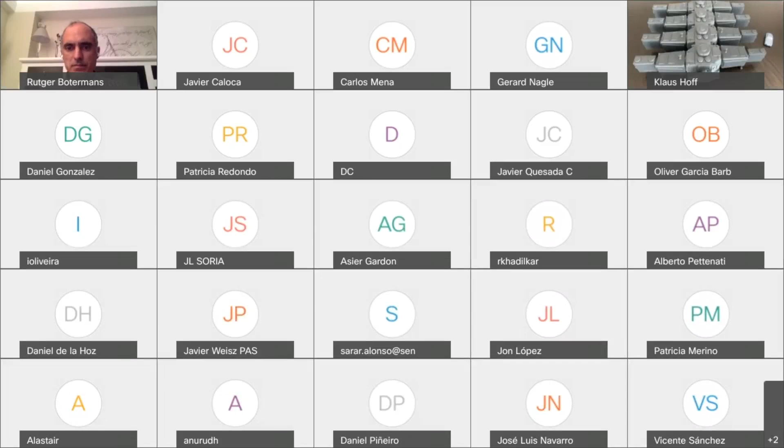Try to say something to make sure that the sound is working. Working. Yeah, we can hear you now.

There's something wrong with your camera, at least on my end. You seem like you're blinking your face. Are you using some kind of background?

Klaus? I don't know if you are speaking now. We cannot hear you. It seems that either low bandwidth or CPU problems with your computer. Okay, can you hear me now? Yeah, we can hear you now.

I think it's better by turning off your video, your webcam. I'll switch it off. Yeah, that's better, we save some bandwidth. We can see your screen, we can also see your mouse. So if you want to highlight something from your presentation, you can move your mouse.

I'll give you some ideas about the challenges and limits we have when applying lubricated reciprocating compressors for hydrogen. To introduce, we have the possibility to compress the gas lubricated or non-lubricated. Non-lubricated has been possible for many years, let's say a minimum of 30 years, due to the development of PTFE with special fillers as the piston and rider ring material.

With these modern plastic materials, we are able to do it non-lube too, but in some applications lubricated service is mandatory - especially in refineries. Refineries always ask for a lubricated compressor since they would like to run the compressor for a minimum of 3 years without any interruption - 3 years,

365 days, 24 hours. They need the compressor running all the time, and therefore they prefer lubricated service, because with lubricated service the wear of the rider band and piston rings is negligible, allowing the compressor to run for a longer period of time.

Some design aspects in our world: we work in accordance with the so-called API 618. API 618 stands for American Petroleum Institute. This is a group in the United States which creates guidance for all equipment used in refineries, and the 618 standard is the one for reciprocating compressors.

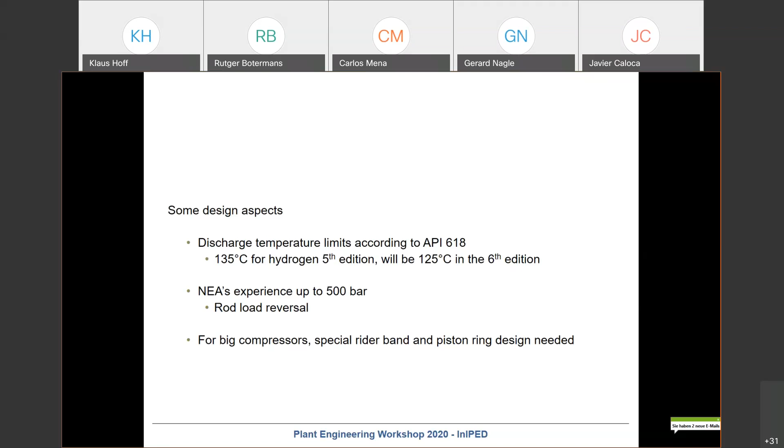The reason for this step piston configuration is pretty easy: we would like to protect the packing. The packing is at the crank end side of the compressor, and it has to seal the gas against the atmosphere toward the frame. Here the pressure limits are more restrictive compared to the pressure limits on a piston. So the packing, in terms of lifetime of its internals, is much more critical than the piston rings. Piston rings can be designed for higher pressure differentials easily. That's the reason why we choose this special cylinder and piston design, just to protect the packing from the high pressure.

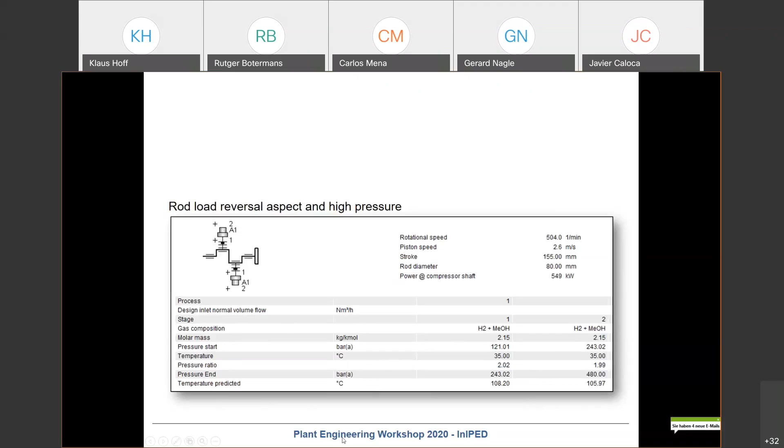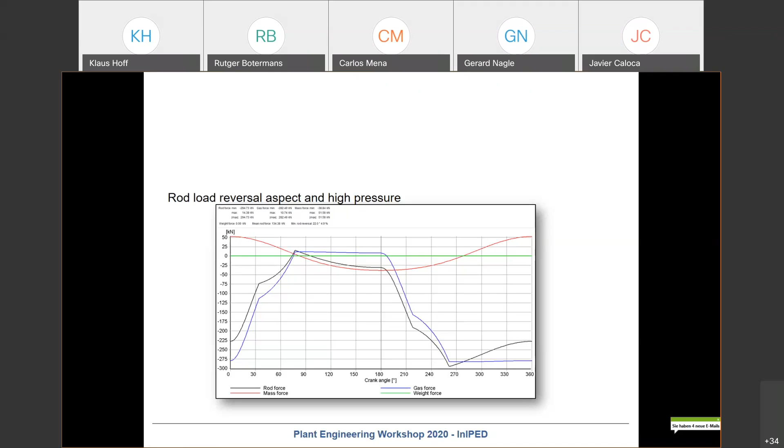Therefore, we developed a hydrodynamic program some years ago, and this is always used because it's part of our daily design program.

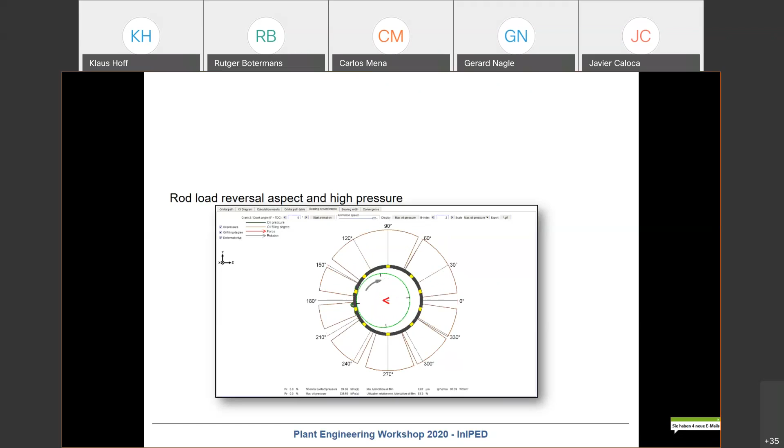For example, when you lose a discharge valve on the head end side, meaning the head end compression chamber always has discharge pressure, then typically you also lose the rod load reversal, and the consequence is typically a failure on the crosshead pin bearing of that throw. So the reciprocating compressor engineer has to be very careful with this challenge.

I mentioned it for the lubricated hydrogen compressors. There can happen some critical things with the rider bands and piston rings. And here I've collected for you some pictures of what can happen. You need to know what to do to avoid that.

Here you see rider bands of hydrogen refinery compressors, big compressors. These are compressors in the power range of 2 to 4 megawatts. So big compressors, our biggest frames. Cylinder diameters in the range of, let's say, 450 millimeters. Some of them 2-stage, some of them 3-stage, depending on the suction pressure. Typically, this refinery application has a discharge pressure in the range of 120 to 150 bar.

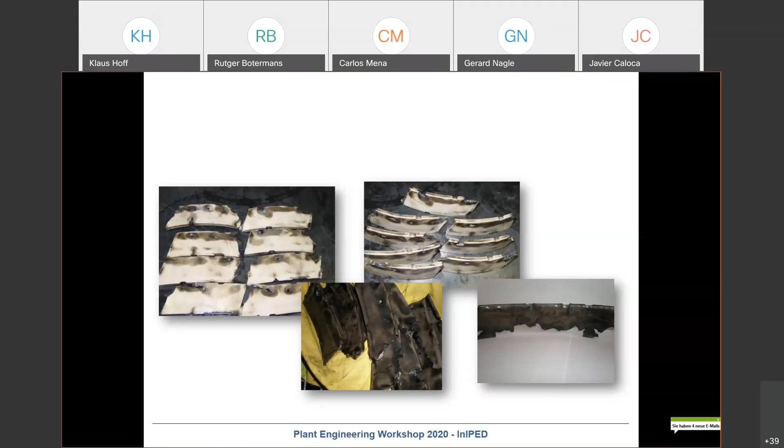And we were faced some years ago with these issues. It looked like burned, completely overheated, and material was really removed. Here, for example, you see that there was a strong erosion in many areas of the rider bands, which were at that time not completely understood. In the meanwhile, we understood what can happen there and found the right answer to avoid that.

Here's another picture. The holes in the rider bands which seem to be burned. Here at the end of the rider bands were eroded areas, material was removed. And what we also found is that for rider bands which were not completely destroyed yet, it seemed to start at the pressure relief grooves here at the end.

So some ideas were immediate there that it has to do something with the flow, the leakage flow of the gas, but the leakage flow of gas typically has not the power to destroy or to erode material. So we were convinced that in addition, liquid must be present there to create this, let's say, erosion or cavitation issue.

The process typically has definitely no liquid, because the source of the hydrogen is completely dry. So the only liquid we have in the system is our own oil, the oil which is used for the lubrication of the rider bands.

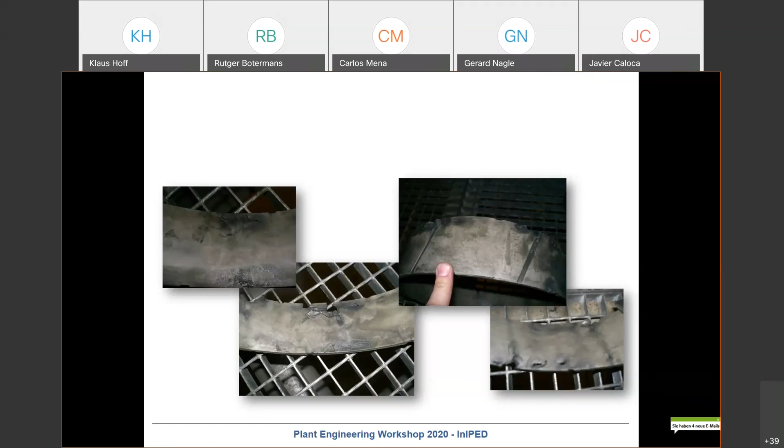Here's another picture of what I mentioned before. Here you clearly see it. Most of the rider band looks okay, but here at the end of the pressure relief groove, we have a high amount of eroded area, which seems to be a kind of cavitation.

When you press, for example, diesel pumps for engines, when you press with high pressure to a small hole, liquid, then at the end and at the beginning, by the high velocities of the oil, cavitation can take place. And here the pictures are pretty similar.

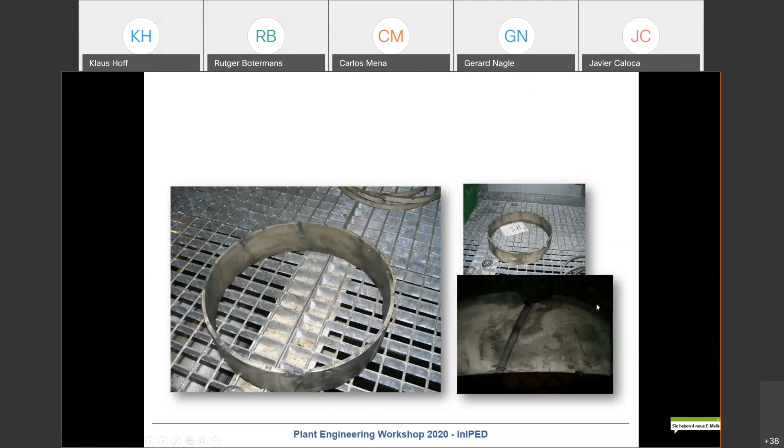Here's another picture. This is the end gap of the piston ring, so this is not the rider band, it's a piston ring. And of course, these end gaps here are not completely closed. Even when we reach the design temperature of the compression chamber, even then we have a small amount of open

gap where a leakage flow can take part or take place. And here you see there are flow signs, and again here erosion starts. This is also a sign we typically found that at the end gaps of the piston rings also erosion was present. Here is another picture of a rider band where you see the shape of the flow pattern. You can see because oil was part of the flow, and therefore you can have an idea how the leakage flow act.

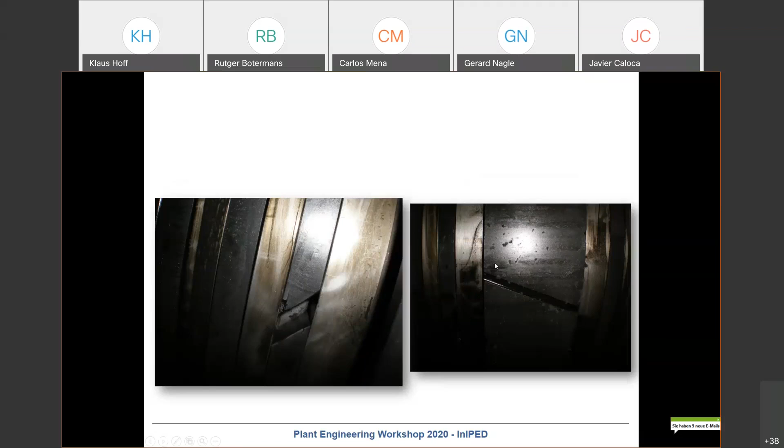Amazing was also this observation. In one of the compressors, we did not only find the issues with the rider bands, but also this pressure release bore was also strongly eroded and increased. So originally, of course, this was a small bore, round, not in this, let's say, rectangular shape.

It was round, and it was eroded. And when we opened the piston, indeed, we found oil in the piston. This pressure release bore is mandatory according to API 618 because we have to make sure that the internal of the piston must always be pressure released. That is a safety device, because when you have a complete gas-tight piston which is filled up with gas pressure and you bring it in a shop and open it, it can create an explosion because there's hydrogen pressure, for example, in this piston, and when you open it, this hydrogen can be released and can be ignited and can create an explosion.

For other applications where you have a poisoning gas, it is even more critical, because when you open it in the shop and you have CO, for example, then people may be hurt. So this is a mandatory thing for API 618 compressors, and it makes sense. It is reasonable. And the bore was also eroded and the piston filled with oil.

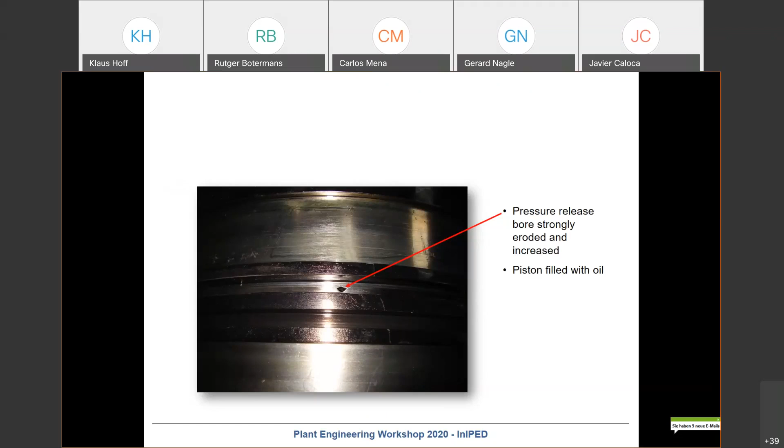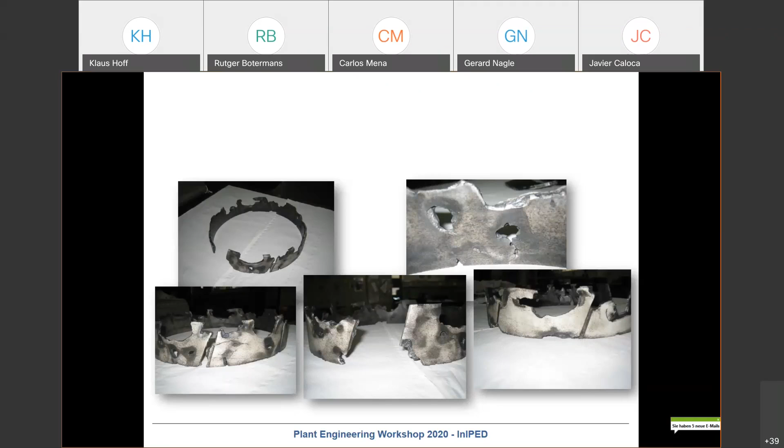Here are some other catastrophic rider band failures we were faced with. And these problems occurred, let's say, in the mid of 2004 to 2007, not only on one compressor, but on many compressors at different installations, not in one installation, it was on different refinery installations. So it was really a technical issue which could not be linked to a certain plant. It must be an issue linked to the design of our compressor.

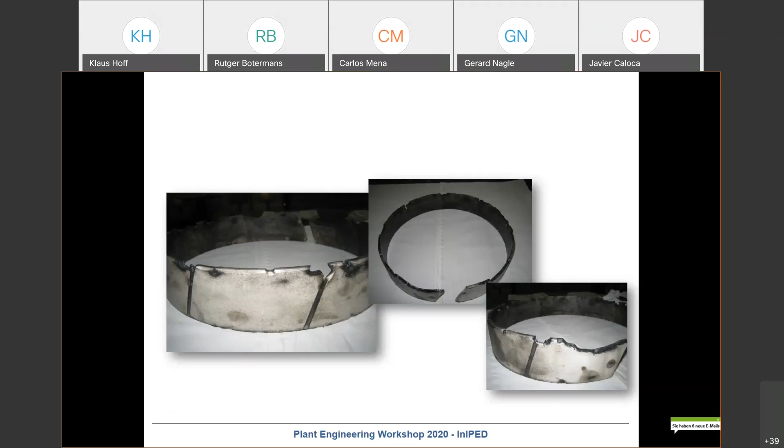Another picture, so always similar. We could change the material itself, so white material means we have no carbon in, it's only PTFE with glass fiber, but whatever we installed, the same issues came up.

And it is clear only hydrogen flow without any liquids would be impossible to create this erosion. So a liquid must be part of the issue, and the only liquid we had was the oil of the lubrication.

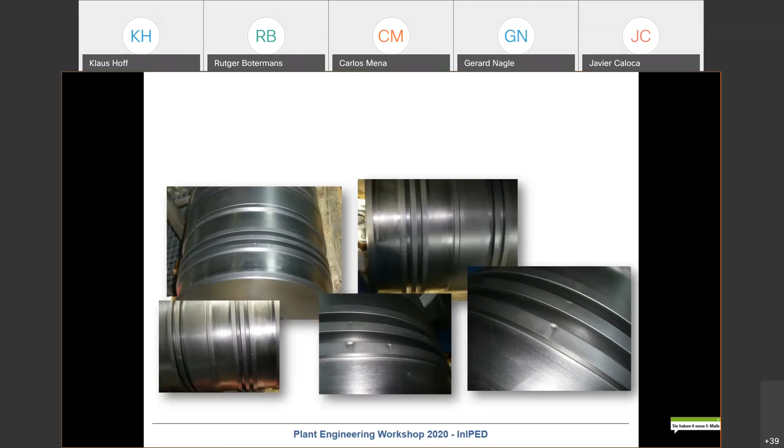Yeah, here the technical explanation of these findings. We had too much frictional heat created at rider bands, and this created excessive oil evaporation. Why do we have too much frictional heat at rider bands?

The API demands a certain amount of rider band length depending on the weight of the piston. In the API, typically horizontal compressors are used, and the rider bands have to bear the weight of the piston and the piston rod. And on basis of the weight,

the rider band extension is calculated. That means here in this application, because of the high power and the relative high or big diameters, the configuration of piston and piston rod were pretty heavy and creates a certain amount of mass, and this must be compensated by an amount of rider band length.

Now, since there is no real hydrodynamics, we have always a mix of hydrodynamics and metallic to PTFE contact tribological system. We create heat, and this heat creates high temperature, of course, locally in the contact zone. We create high temperatures. And with high temperatures, it's clear an oil evaporation occurs, because in this contact zone we have oil.

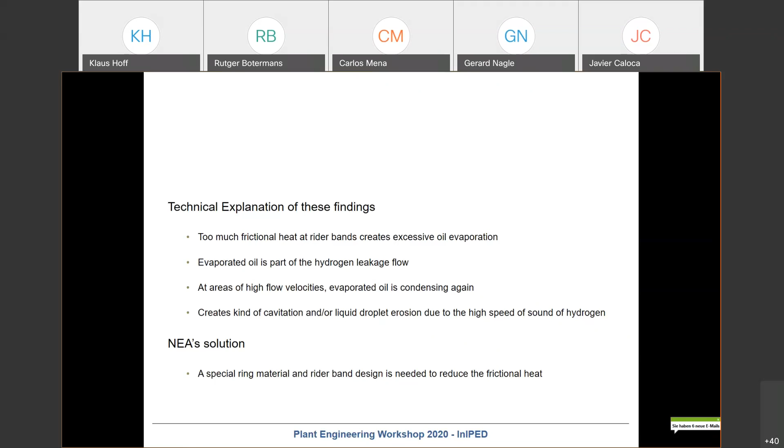This is important for you whenever you have the task to compress hydrogen, high pressure or relatively high pressure above 100 bar and big power - this issue can occur and you have to be careful with the rider band design.

I mentioned this is the second part of the presentation. The reciprocating compressor also allows compressing gas, not only hydrogen, without any oil.

We got the chance some 30 years ago with the development of PTFE as a rider band and piston ring base material. So PTFE is the key that allows us to run reciprocating compressors non-lubricated.

The PTFE, together with the liner material or piston rod material, is able to create, together with the gas, tribochemical reactions which create a stable transfer film. It's a certain amount of lubrication, not by a fluid.

Now the lubrication takes place just by the tribochemical reaction of the ring material, the liner material, and the gas and the pressure. So there's a complex chemical reaction which creates a so-called transfer film on the liner surface. When you have a good tribological system, this transfer film is very stable.

When we go up to higher pressures, and now we talk again about hydrogen, we at NEA had a lot of experience with hydrogen filling bottle filling compressors. The steel bottles for hydrogen typically, in the past, were designed up to 220-250 bar, and for this pressure a non-lubricated reciprocating compressor can be used when done correctly. Above this pressure, typically nowadays we use, and this is how NEA works, diaphragm compressors.

The pressures of steel bottles nowadays go up to 350 bar, and for that application we no longer use a classical reciprocating compressor, but a diaphragm compressor. To the diaphragm compressor, I come in the last part of the presentation.

When you do it as a recip, then you have some challenges. Typically you have a high sealing pressure on the packing. What we know from experience up to now is that a gas-tight solution for dry running can be achieved up to 100 bar at the packing with 1 year of continuous operation, so 8,800 hours. When you go above 100 bar at the packing, the lifetime goes down.

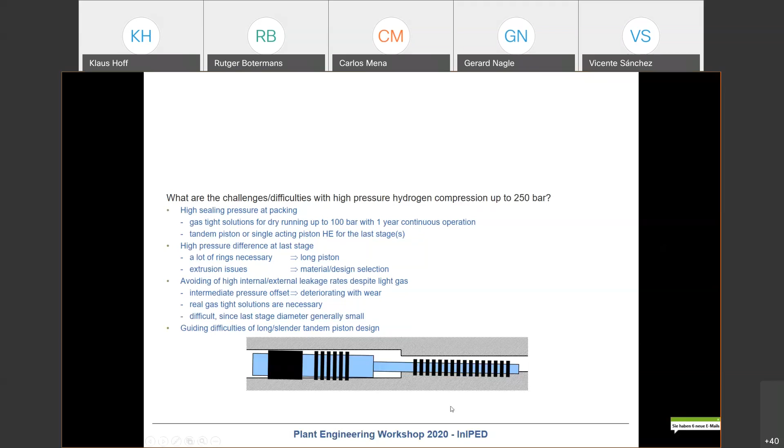Here are some examples of these types of bottle filling compressors, and you see in the end it depends on the suction pressure. For example, here was a relatively small suction pressure, so we needed 4 stages to create these 200 bar. In some applications, since the suction pressure was relatively high, look here, 36 bar, then we could do it in 2 stages. This one was 210.

Here in this application, the final discharge pressure was not as high. But also here we had an application where we managed it from a minimum of 19 bar up to 224 bar with 2 stages. So it depends on the application, mainly on the suction pressure, but also on the allowable discharge temperature. Here in this bottle filling segment, they are not as strict as the refineries in terms of allowable discharge temperature. So in this case we probably have discharge temperatures in the range of 140 or 150 degrees C, which would not be allowed in a refinery.

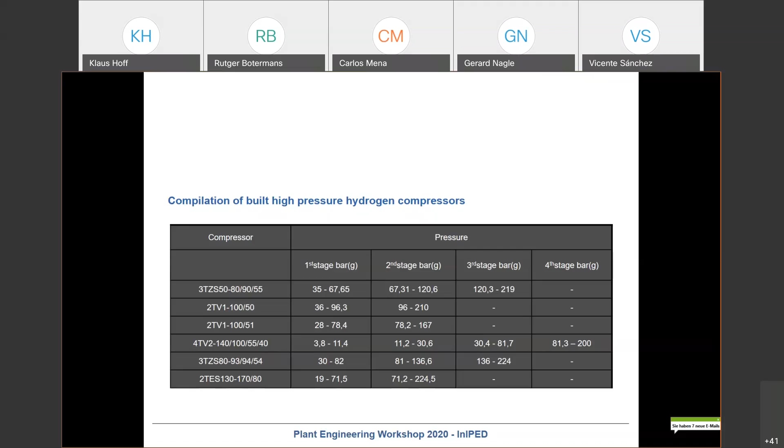Just to give you a small explanation about how the piston ring works. Here's a sketch. This part is a piston with a groove for the piston ring. This part would be the liner. Now on that side we have the high pressure, and on that side the low pressure.

What happens with the pressure? The pressure goes into this gap and into this gap, and the pressure on that surface presses the ring against that surface. The pressure on that surface presses the ring at the liner surface.

In the gap here, it is not really a gap. By the contact pressure you have almost no gap, but it is clear that due to surface roughnesses, a small amount of gas flow will still take place here. By this small amount of flow, we have a pressure reduction on that area. Therefore, when you add the pressure on that surface and the pressure on that surface, you have a relative force acting against the liner surface, and a sealing effect is achieved.

The same is true for that surface. Here also a very small leakage flow will be present, and therefore the pressure is not constant as here, so we also have in this direction a relative force which presses the ring at that surface and that first surface. That is how we seal by the piston ring.

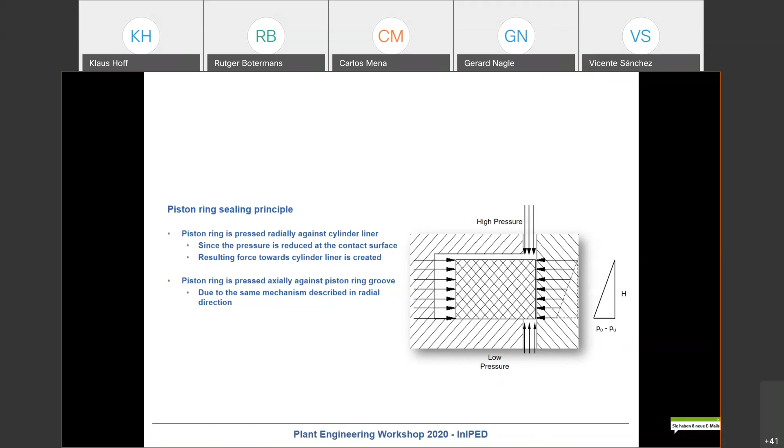Here are the opportunities or possibilities we have to influence the leakage flow, especially for hydrogen. This is the typical ring system. We have a rectangular ring and an end gap. Typically, the end gap is under an angle. Just by this angle, we can reduce the leakage flow slightly.

That's the reason why we use this type of end gap. But it's clear, you can see it here with the blue arrow, there is a clear leakage flow possible, like a labyrinth system, and there is an amount of leakage flow. Even with this type of piston ring, with the so-called overlapped end gap, we still have a clear cross-section area where a leakage flow can occur.

The only way to reduce the leakage flow to a real minimum is the use of the so-called twin rings. The twin ring consists of two rings. The outer ring is seen here, and the inner ring is seen here. The sealing goes from high pressure to low pressure in this direction. If the groove goes beyond this area of the inner ring, there is no chance of any leakage flow from that side to that side. So these rings are called gas tight, since they do not create any remarkable leakage flow.

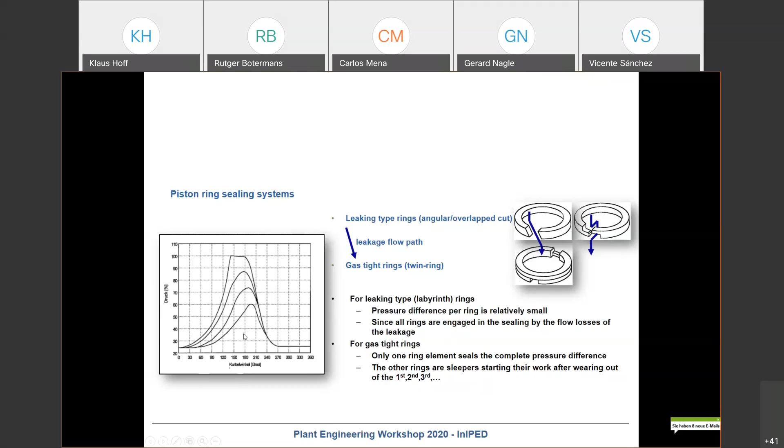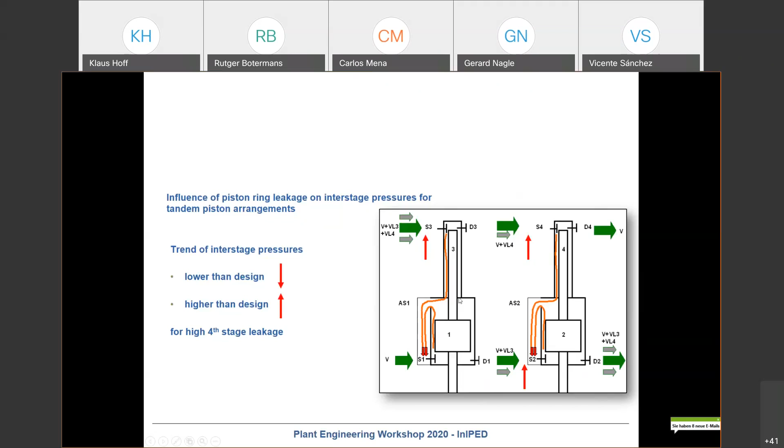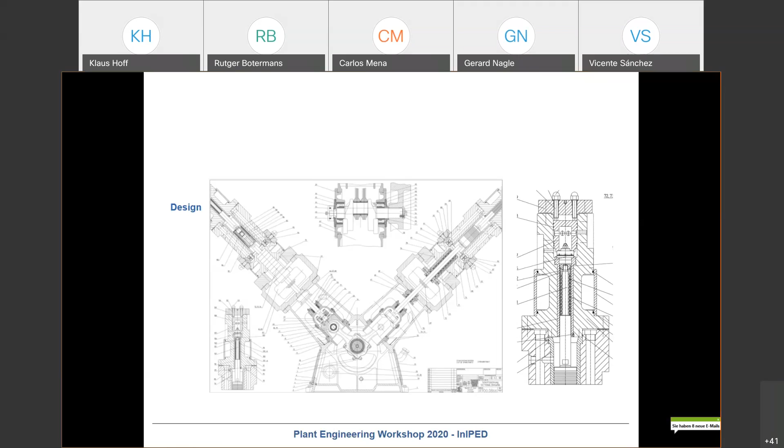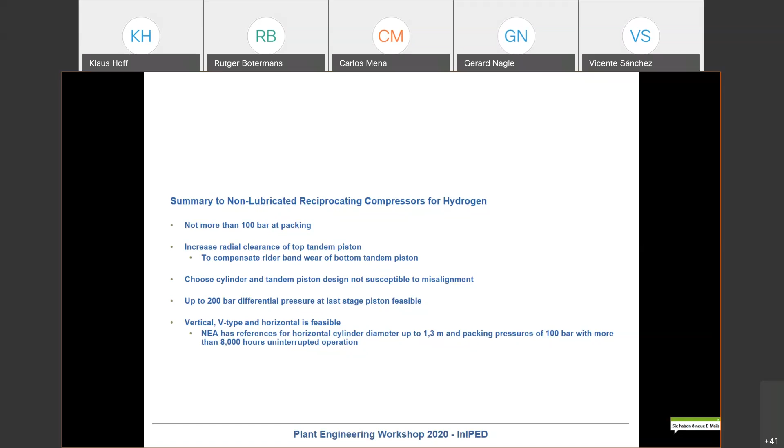You can use vertical, V-type, and horizontal compressors. Horizontal is typically not used for bottle filling because you typically have small compressors there, so V-type and vertical are preferred. But there are also applications with lower pressures and high flow where you use horizontal compressors. We have experience with up to 1.3 meter cylinder diameter and packing pressures of more than 100 bar, with lifetimes above 8,000 hours of uninterrupted operation. So this is also possible.

Okay, now I would like to come to the third part: the energy transition with Neuman & Esser. For this energy transition, at least when we look into the mobility sector, we need another type of compressor, which are also reciprocating compressors, but certain reciprocating compressors. I would like to explain this type of compressor - what are the requirements for a hydrogen filling station compressor? This will be my main focus in this part of the presentation.

What are the appropriate types of compressors due to these requirements? The company Hofer, which has 90 years experience in that area, was bought by NEA Group in the year 2015. Since that time, I am deeply involved in diaphragm and hydraulically driven compressors. The complete development and further development of that program is now in my department. In the end, the diaphragm compressors and hydraulically driven piston compressors will have the same level of expertise as we have with our reciprocating compressors. That's my clear target, and we are on a very good way.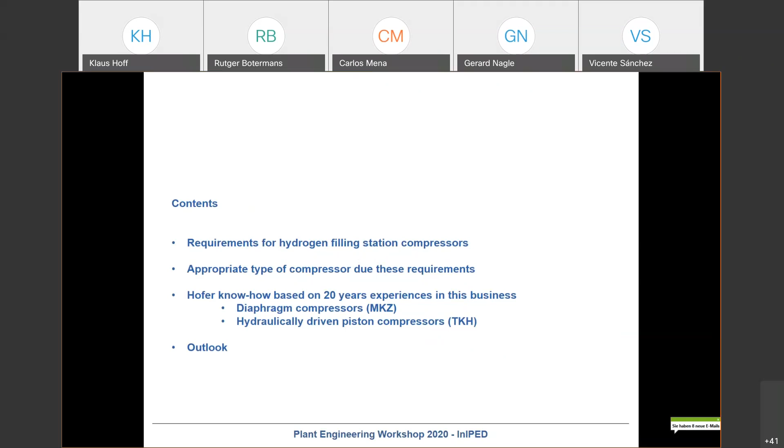What are the requirements for hydrogen filling station compressors? The compression must go up to 1000 bar, very high pressure. But this is needed. The energy density per weight is high for hydrogen, but the energy density per volume is very low. That means at ambient condition you cannot store any real remarkable energy. You can only do it by increasing the pressure. Even 200 bar, which is typically enough for a natural gas application in a car, is too little. You would not reach enough kilometers with 200 bar hydrogen. Only when you go up to 700 to 750 bar in the tank can you achieve, with a fuel cell driven car, 400 kilometers, which is nowadays assumed to be the minimum you have to reach with a car. So reaching 400 kilometers with a fuel cell driven car needs 750 bar pressure in the tank with the modern high pressure tanks which are available.

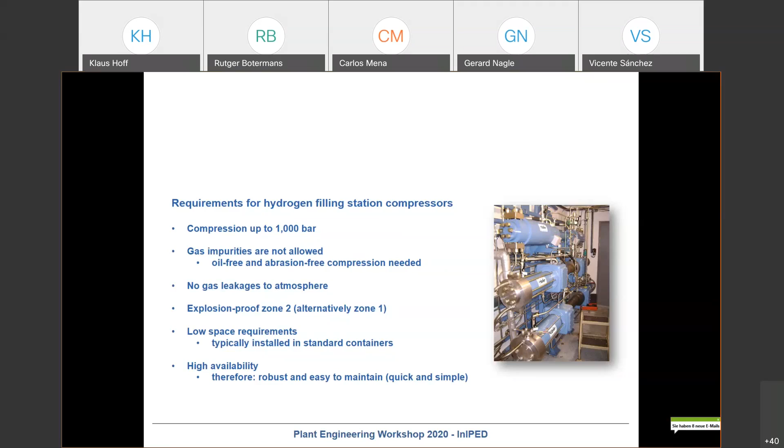Screw compressors have a similar flow range, and even the pressure can go further up, but be careful—you have to distinguish between oil-flooded screw compressors and non-lubricated screw compressors. The non-lubricated screw compressors go only up to, as far as I know, 40 bar maximum; I think the real limit is in the range of 20 bar. Rotary compressors are also a choice, but only applicable for small flows and small discharge pressures.

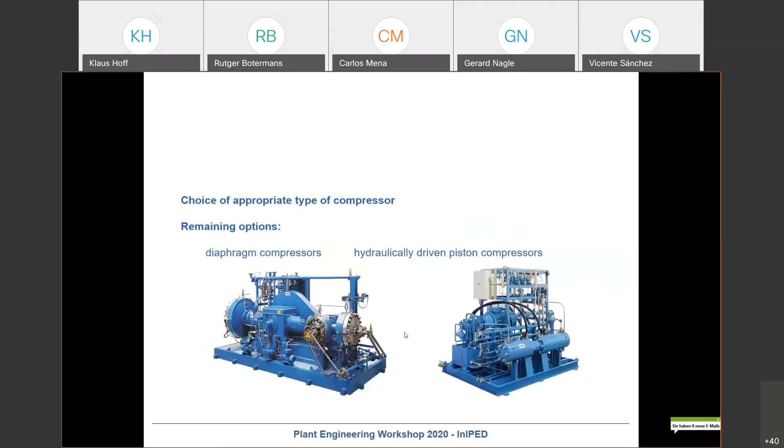This type of compressor was historically the first choice for this application. Hofer started with diaphragm compressors for hydrogen filling stations, and the experience goes back to 1990. There were first public buses in Germany, in Hamburg for example, hydrogen-driven, fuel cell-driven buses, and a Hofer compressor was used for the filling.

At the airport in Munich, there were also buses for the airport. There was a project to do it with fuel cell buses, and there too Hofer installed a diaphragm compressor as a compression system.

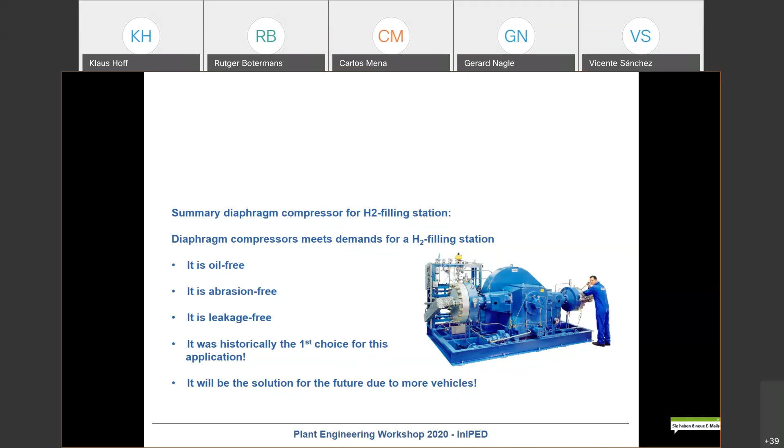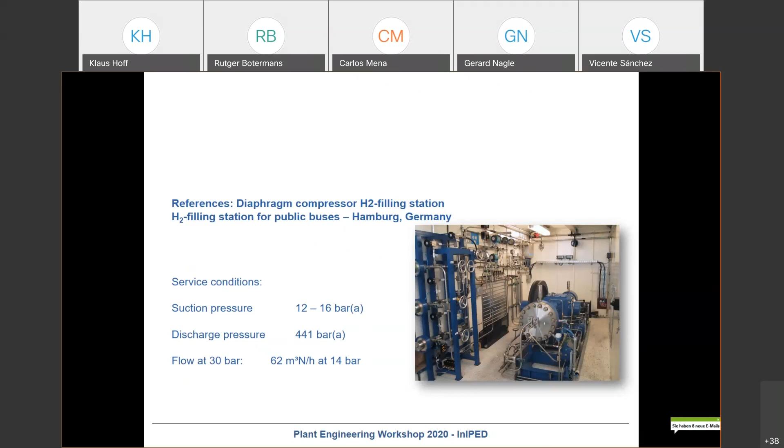Some words about the diaphragm compressor system in regard to the application of hydrogen filling stations: diaphragm compressors are perfect for continuous, uninterrupted, constant flow operation and for higher flow demands. Then the diaphragm lasts for years - we know that diaphragm compressors run 5 or even 10 years without the diaphragm ever being changed. So there's no real service needed, except for valve service, and that can be done without removing the diaphragm head.

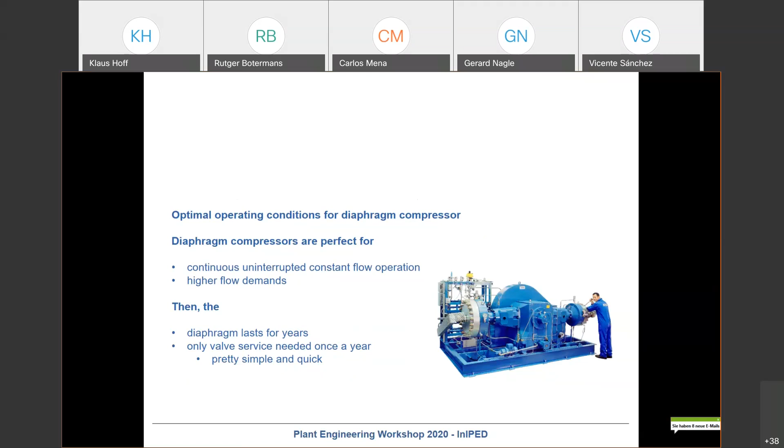What does a diaphragm compressor not like? Interrupted operation. Uninterrupted, fine; interrupted, less good. The expected lifetime of a diaphragm is then about half a year. Our experience is that when you start and stop continuously, after half a year you have to exchange the diaphragm. This is just a rule of thumb. We cannot design the diaphragm compressor so that it really lasts a minimum of half a year. This is impossible.

Statistically it will be half a year, but there is a statistical spread between at least a quarter year, and in some cases it can be one year. Even in worst cases, you can have the situation that the diaphragm is over after one week. It can happen. It is not likely, but it can happen. And this is, of course, a disadvantage.

Next, the diaphragm exchange is time consuming. It takes at least one shift, because you have to remove the oil, remove the diaphragm head cover. There are a lot of bolts, and it's typically a heavy piece, so you need a small crane. Then you have to replace the diaphragm, mount the diaphragm head against the cover against the head, and refill with oil. So you can imagine this is time consuming.

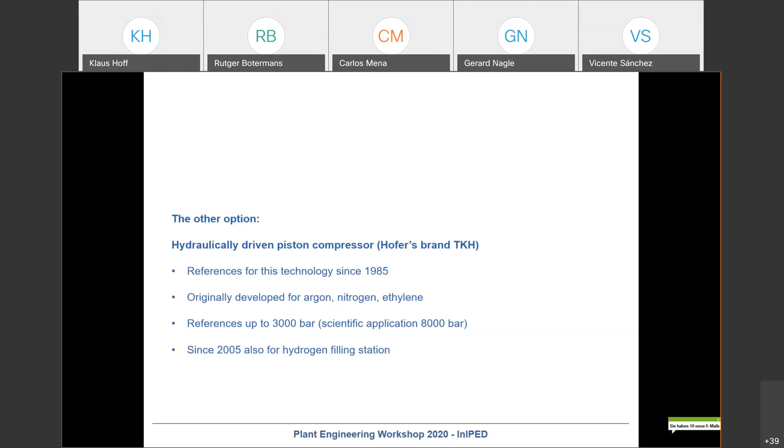It's clear we have to create a reciprocating movement - we have to push oil in one direction, and when we reach the end position the flow must reverse, going from that side against the piston to compress the gas of the second stage. Of course, as with normal reciprocating compressors, we need an intermediate interstage cooler to remove the compression heat - same as for normal compressors. Though instead of a crank drive, we have a hydraulic drive here. The good thing is, with the hydraulic drive, we don't have to worry about the so-called rod load reversal. Of course we have no rod load reversal here, but we also don't have any crosshead pin bearing which can fail. The hydraulic does not fail when the load does not reverse.

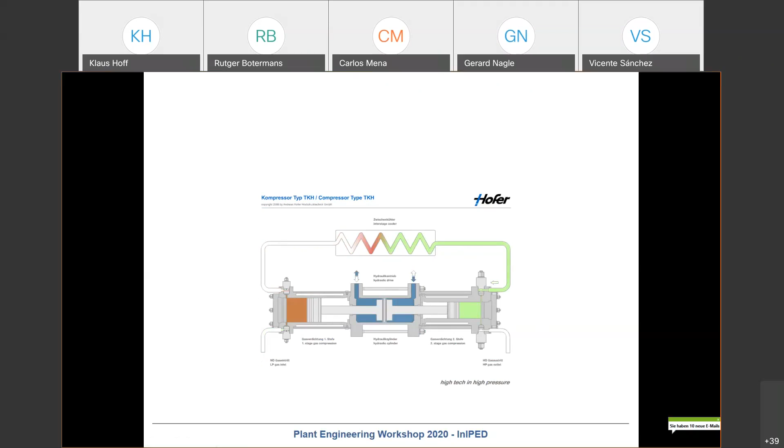Here's also an animation of the key features of this hydraulically driven reciprocating compressor, to explain again what I've already mentioned. So here's the piston. The piston has no connection to the piston rod, you can just remove it. And you can do that because the load is always compression load. There's no chance that the piston lifts off the piston rod.

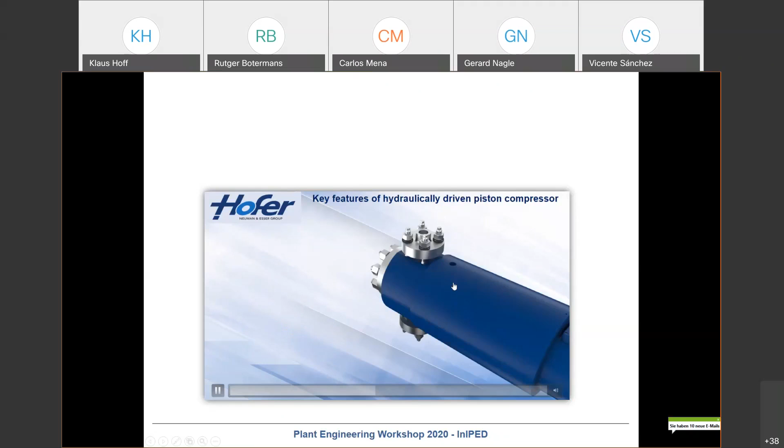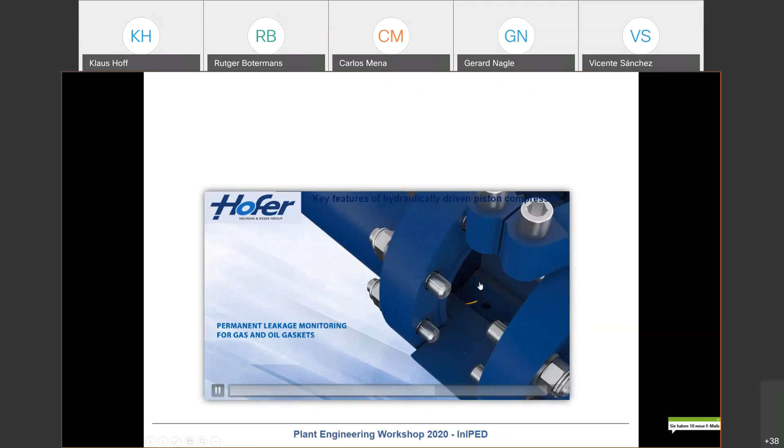Yeah, we have a cooling chamber, of course. So this area where the piston is running is perfectly cooled by water. That's clear, we have frictional heat and compression heat, which is partly removed by the water. And then we have a small amount of oil. It's clear that the sealing system of the oil piston is not completely oil tight, and this amount of oil needs to be removed out of this area.

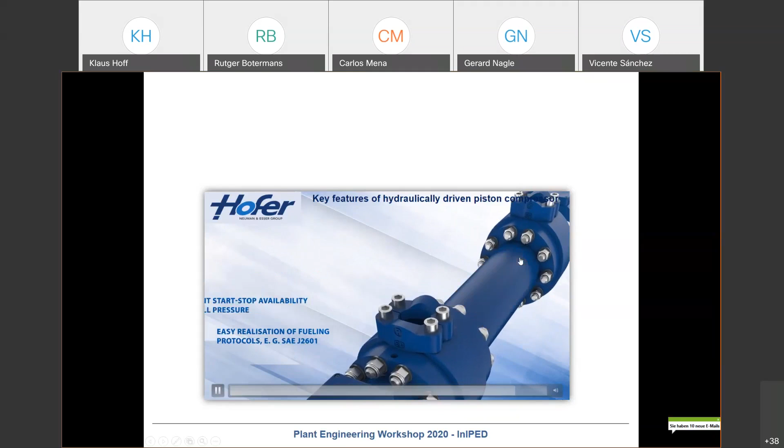The capacity control, I mentioned it, from 5 to 100%. It's easy because the oil unit must only adjust the flow, and this can be handled. The flow of the oil must be reduced, and when we have less flow by the oil, then of course the movement of the piston is slower, and the movement of the gas piston is slower, and in the end we have less volume flow. So it is very easy.

And the way how it is done by the pump: the oil pump is driven by the electrical motor, and the flow reversal is an axial pump with an eccentric working of the pump elements, and the angle of this eccentricity can be adjusted down to 0 or even to the other direction. By this effect, you can reverse the flow, but you can also reduce the flow. And this is easy, because it's an intrinsic part of the hydraulic system. It is not a feature you have to add, it is there anyhow.

The key features of a hydraulically driven piston compressor: it's oil-free. The oil system is on that side, and in between we have this intermediate room, which is pressureless, ambient pressure, and any oil leakage and any small amount of gas leakage go away through this leakage system. But there is no chance of oil getting into contact with the gas. Therefore, it's oil-free. It's also technically abrasion-free.

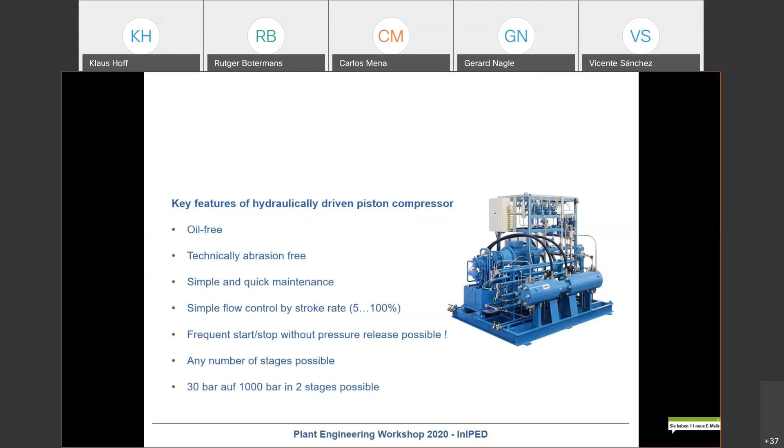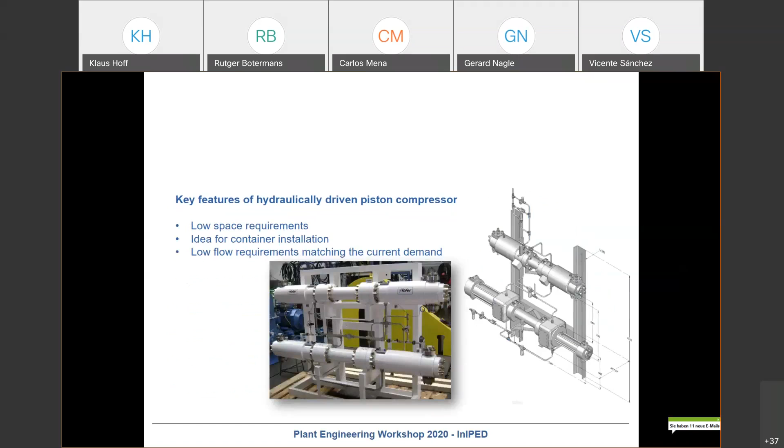Here's some examples. Key features of a hydraulically driven piston compressor: low space requirements, ideal for container installation, low flow requirements matching the current demand. So this system is only reasonable for low flow demands, but currently we have low flow demands for the filling stations.

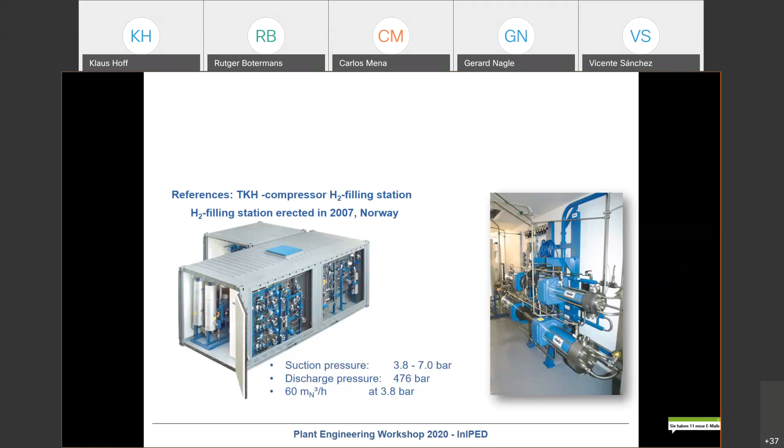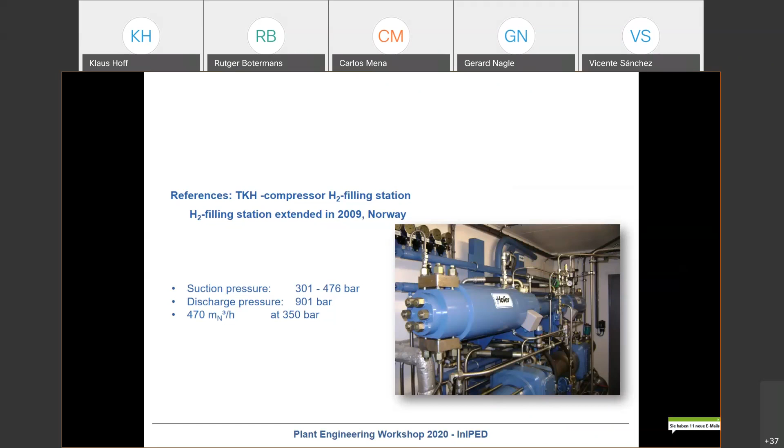This was a research installation in Norway. And here we have Berlin. Public buses in Berlin - there was a public fund to do fuel cell buses there in 2010.

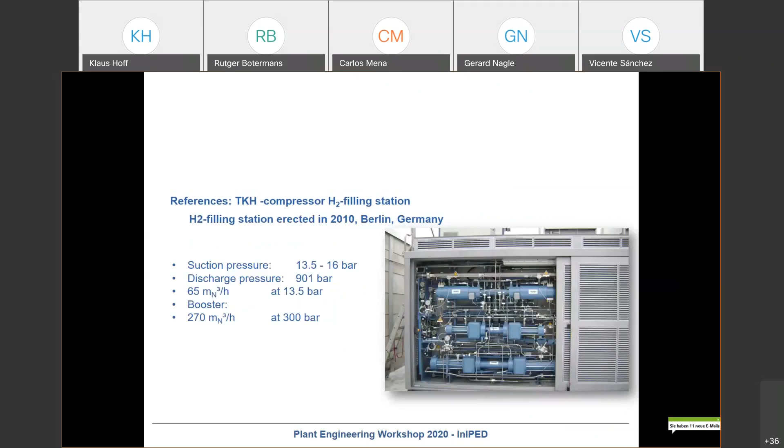And this is in Korea. Currently, most of our compressors went to Korea. They have a public program to create a lot of hydrogen filling stations all over the country, and there's a real boom. We sell many compressors every year just for Korea because there is this public demand, and there are many players taking part in this business.

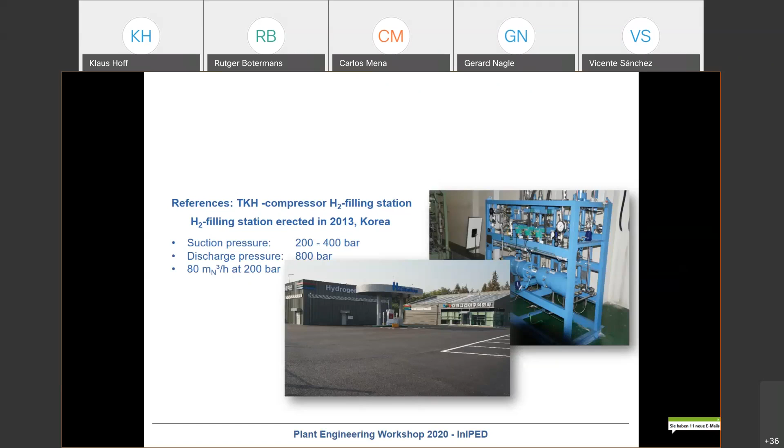China is coming, that's for sure. We also started selling both diaphragm compressors as well as hydraulically driven compressors for China.

And that's one of our key customers. With this customer, we have in the meanwhile, I don't know exactly, but I would say 50 compressor installations, mainly in Europe, and in Europe it is mainly Germany, because in Germany we also have a program. The plan is to create 400 hydrogen filling stations all over Germany. The plan is not reached yet. It should already be reached. Currently we have in Germany 85 or 86, so there's a long way to run to reach this 400.

My impression at the moment is that the energy toward reaching it is going down, because the companies financing that are a consortium of many companies - Air Liquide, Linde, Mercedes-Benz, and some others are supporting this project with their money. Of course the government also supports it, but a big amount of money is really coming from these companies. And since they don't see a huge amount of fuel cell-driven cars in Germany, they are a little bit reluctant to support more filling stations.

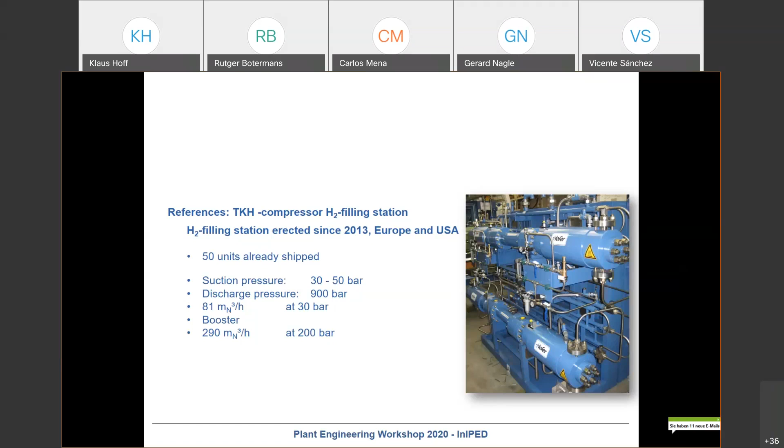That's for sure. Here is a picture of our shop in Mülheim in Germany, and we have the capability to package up to 20 units in the shop itself. But since sometimes we need to do more than 20 units per year, we have some packagers around the facility in Mülheim who are also trained by us to do it on our behalf. So even 100 units per year would not be complicated for us, because we are prepared for that.

And we think that it will come, not in Germany, not in Europe. I don't see any big things in Europe except for Germany, but Korea and China. The biggest market will be China, because there is a real political agenda behind the hydrogen filling stations, because they would like to push fuel cell cars in their country.

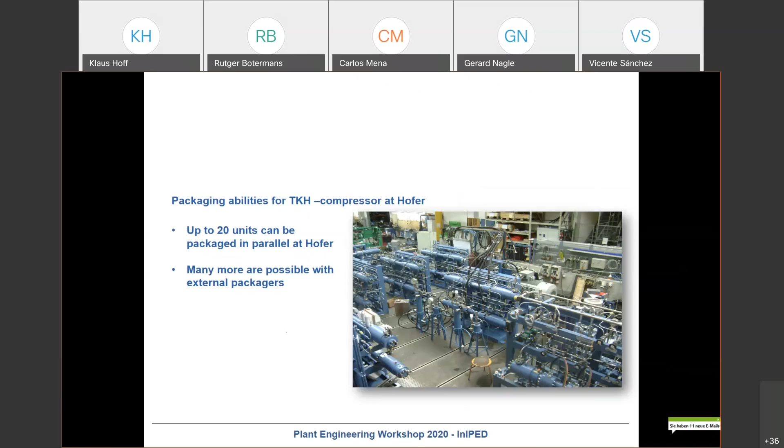This is important for you to get an idea what can be done with which type of compressor. We have three types of compressors which come into question for non-lubricated hydrogen compression: the hydraulically driven piston compressors, the diaphragm compressors, and the mechanically driven reciprocating piston compressors.

We have some pressure restrictions. 200 bar is the pressure limit for reciprocating compressors, non-lube. We would like to increase it to 400 bar, but I doubt 1000 bar will be possible. So maybe 400 bar in the near future, but not more. 1000 bar is easy for the hydraulically driven piston and also for the diaphragm compressor. Both systems can handle the pressure needed.

But now you get an idea of the volume flows, the volume flow limits per compression chamber. For hydraulically driven piston compressors, we have only 15 cubic meters per hour as the possible volume flow.

For diaphragm compressors, it is much more, of course. With one diaphragm head, we can reach 200 cubic meters per hour. But for a reciprocating compressor, we are in a completely different world. With the reciprocating compressor, we could reach 5,000 cubic meters per hour with one compression chamber. Imagine a four-row compressor has 8 compression chambers, so the flow of such a compressor would be 8 times 5 for 40,000 cubic meters per hour.

And this looks like this system. You see here on the right, this will be the low pressure reciprocating compressor, first stage, let's say up to 150 or 200 bar. Then the high pressure, 1000 bar, will be done with diaphragm heads from 200 to 1000 bar. In a diaphragm head, you can reach this pressure ratio of 4 easily because the cooling effect by the oil and the diaphragm is much better than in a reciprocating compressor.

So this might be the future, and we as Neuman & Esser are already prepared. We already had projects, not for cars, but for trains. There are also projects out there - fuel cell trains in Germany, for example, we have some areas where fuel cell trains are running. For these fuel cell trains, they need bigger amounts of flow, up to 400 bar, and for this kind of concept was offered. Unfortunately, we did not receive an order for it yet, but we are pretty convinced that it will come.

Okay, now I would like to summarize my presentation. I gave you the idea of what is needed for the hydrogen filling station, what are the requirements. Then I gave you an idea of the appropriate type of compressors due to these requirements. And our know-how, which is based on Hofer know-how, is 20 years of experience in that business. Hofer was one of the first companies really shipping compressors for hydrogen filling stations.

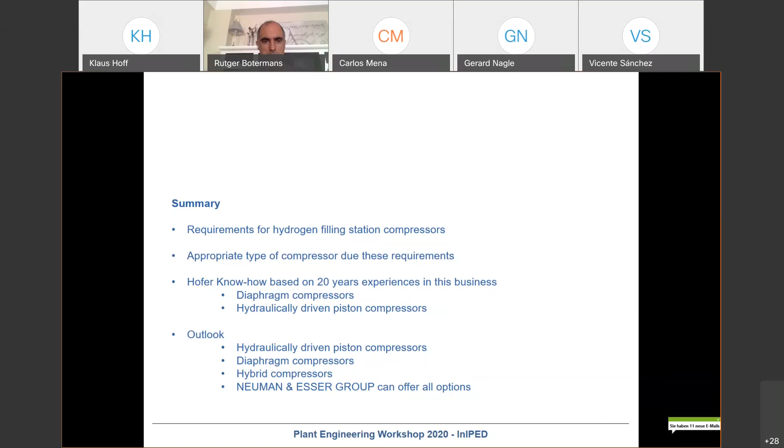The first question was: what is the minimum rod load reversal degrees that Neuman & Esser recommends? This is a question not simply answered. In the past, API 618 demanded at least 15 degrees of angle and 3% of the main load as minimum. This restriction no longer applies for Neuman & Esser, since we have a special hydrodynamic calculation tool. The old API rule gives a rough idea and generally works, but we've had cases in the past where a crosshead pin bearing failed even though the old API 618 requirement was fulfilled. So it depends on the load, and I can't give you an exact value. I can just say the old API demand is a good idea, but at Neuman & Esser we check it individually.

Even for very low loads, we sometimes do not need any rod load reversal at all, but this is only true for lower loads. For higher loads, even our bearing will fail. For lower loads, it is possible to run the compressor without any rod load reversal. So the answer is, I can't give you a fixed value, but I can say the old API 618 rule is a good rule of thumb. If you are in that range, in most cases it will work. But a final decision we as Neuman & Esser can only make with our hydrodynamic tool.

Next question: what is the maximum cylinder diameter above which special rider bands are considered? I think this relates to lubricated ring failure problems. The diameter itself is not the key factor. We had this issue with smaller diameters and with bigger diameters.

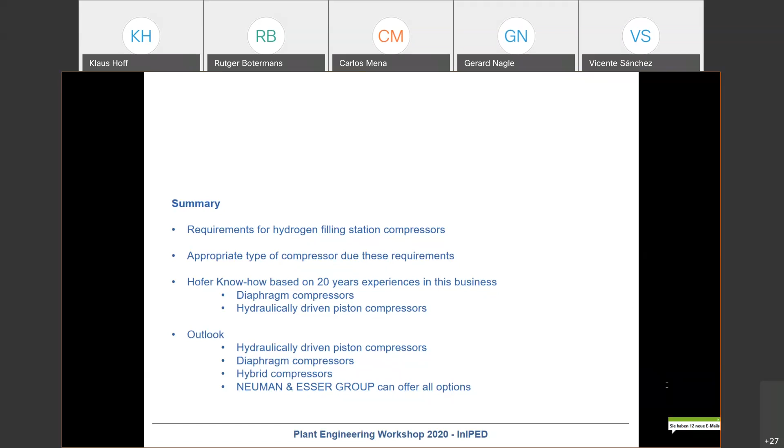It's about reciprocating compressors. You showed the three possible configurations: vertical, V-type, and horizontal. Please clarify the limits of each solution. So vertical, again, depends on lubricated or non-lubricated, but for vertical and horizontal we have the limit. Maybe, Klaus, sorry to interrupt, you can show the diagram, go to the slide with the diagram. I don't know if that's possible.

Here, you talk about that one here. Yeah, I guess that's right. Maybe Alberto can. Yeah, this is not clear.

This is a diagram I've taken from a textbook, so don't kill me if these numbers aren't 100% correct. But in general, at least for reciprocating pistons, I'd say the numbers are correct. I know turbo compressors can handle 700 bar. I worked for Siemens 20 years ago, in Germany, in the development department of single shaft compressors.

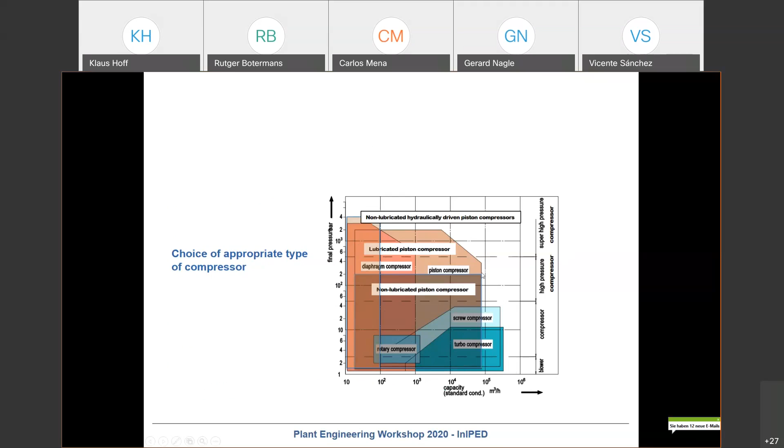And I know 700 bar is possible for turbo compressors, but the limits, maybe I explained it rather here. I think that wasn't the right slide. Sorry, it's the configuration: vertical, V-type, and horizontal. Sorry, yeah, so here, this is more interesting for you.

So the restriction for the hydraulically driven piston compressor is clear: we have low speed, 15 revolutions per minute. It is slow, and to create the same amount of flow you need huge cylinders, but huge cylinders end up with huge oil pressure loads, and therefore huge hydraulic drive systems. When the power of the hydraulic drive goes up, the drive will be very big and very expensive. So there's a limit where a directly driven frame becomes more economic than a hydraulic drive. That's a clear point here.

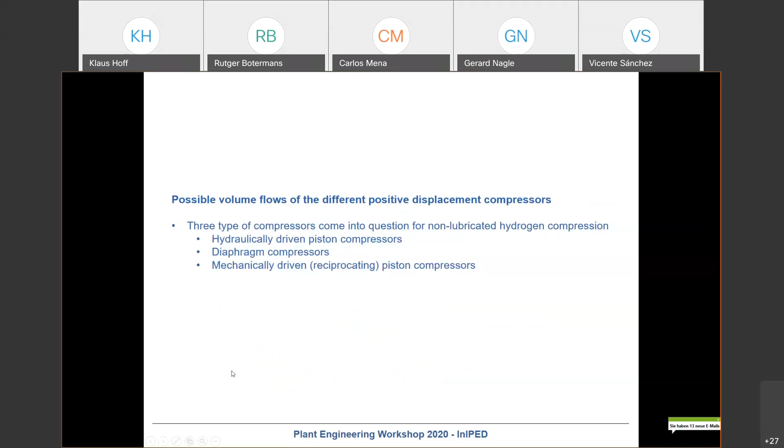The diaphragm compressors have their problems in the diaphragm head itself. I'll explain it with a movie, I think.

That means for a relatively small flow you need a huge diaphragm head, and therefore the piston diameters of a diaphragm compressor are maximum 220 millimeters - that's the maximum diameter of the piston. Then you create the biggest diaphragm head available. More is not possible, and that's why the flow demands of a diaphragm compressor are limited.

It is not limited by the piston diameter, it is limited by the possibility of compressing gas with this diaphragm head. The diaphragm head becomes bigger and bigger, and for Neuman & Esser, the maximum diameter is 1 meter - that's the maximum possible diameter we can build, from the diaphragm itself. The reason is the metal sheets aren't properly available beyond this size.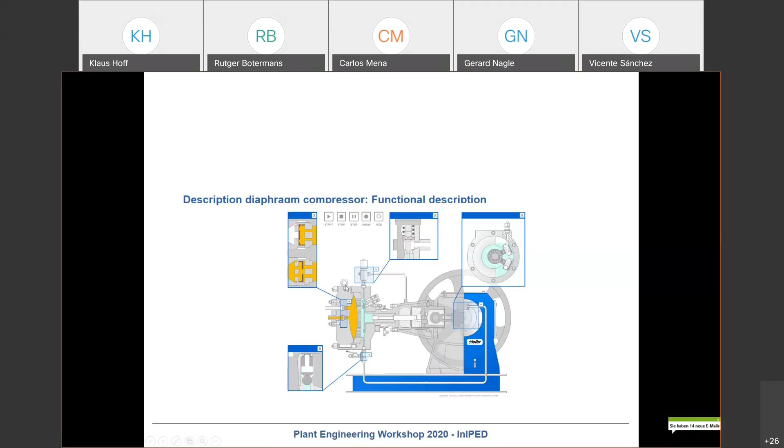And the point is, the bigger the diameter, the bigger the load, so the bigger the cover and the number and size of bolts needed. There's also a physical limit - you can't do it because the thickness or strength needed in the pieces is higher than available materials allow. That's the reason the flow for a diaphragm compressor is limited.

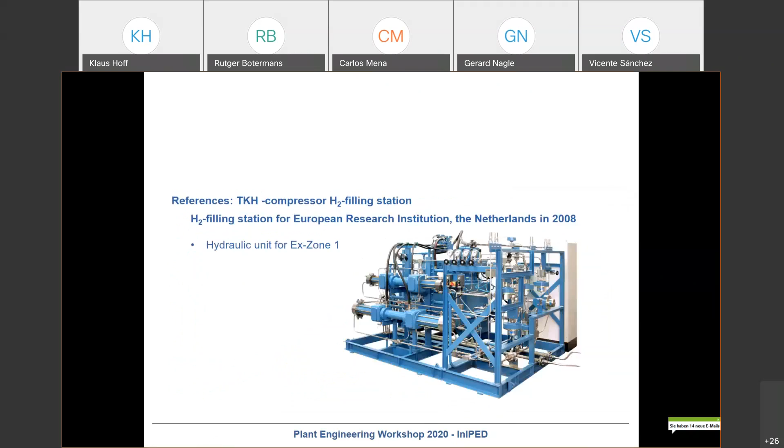For reciprocating compressors, there is no real limit. The only real limit is the available frame. Our biggest frame is a 1,500 kilonewton rod load frame, and I can make the cylinder as big as possible, as long as the load by the gas on the piston is not more than 1,500 kilonewton. Then we are at the end.

Of course, one could create frames with even more rod load, but at the moment we and all our competitors are all in the same range. The biggest frame is always in this same range, around 1,500 kilonewton rod load. So it seems there's not the demand to create a frame with much more rod load, and that is a limit.

And the flow here is calculated with our maximum rod load. I just make an assumption - maximum rod load, then I put a low pressure, let's say 30 bar, compressed it in that area, and looked at which diameter can be reached with the maximum stroke, and from that I calculated the flow.

So that was a pretty simple way to do it. I'm not sure if I completely answered the question correctly, maybe the person can ask again. Then maybe Alberto Petenati can send a message in the chat to everyone to confirm you have replied to his question.